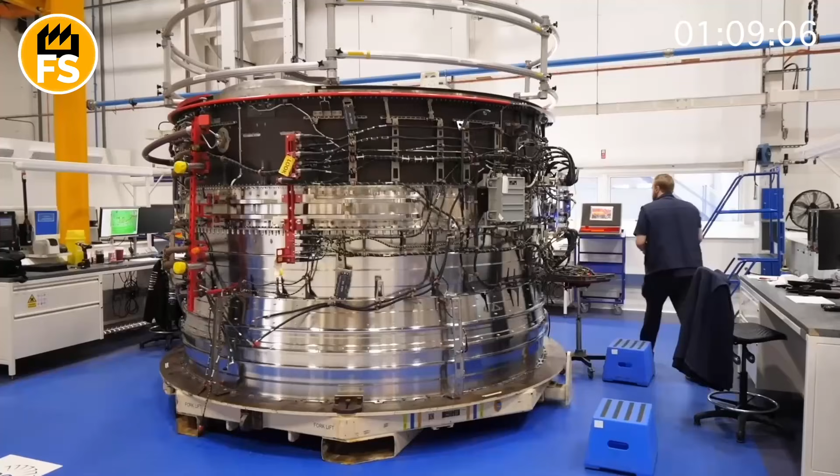Did you know that the machines powering global industry, transportation, and our electrical grids consume energy equivalent to building thousands of the Great Pyramids of Giza every single day? This hidden power isn't just about raw force. It's delivered by some of the most massive and awe-inspiring engines ever conceived.

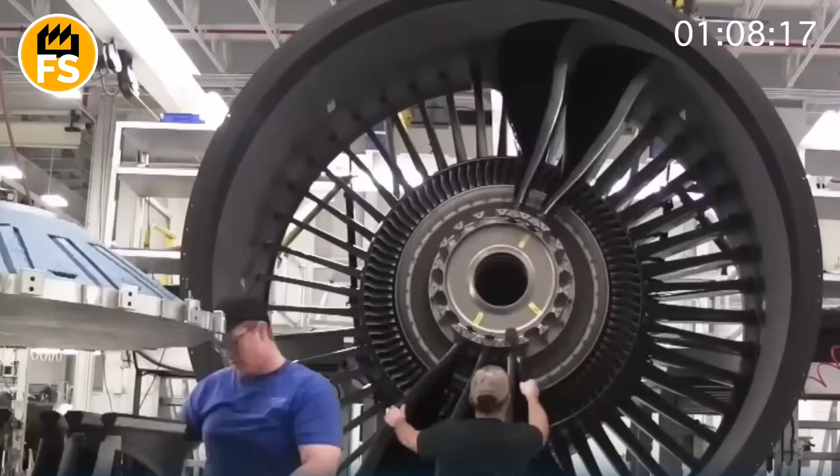From the dawn of the industrial age to today's modern world, engineers have chased the dream of bigger, stronger, more efficient powerhouses. Get ready to take a journey through history and dive into the incredible scale and engineering genius behind the world's most powerful and giant engines.

Our journey begins in the age of steam, a time when raw pressure was king. Picture the late 18th and 19th centuries. The engines that drove the Industrial Revolution weren't small. Early steam engines were clunky, but they quickly grew into colossal machines.

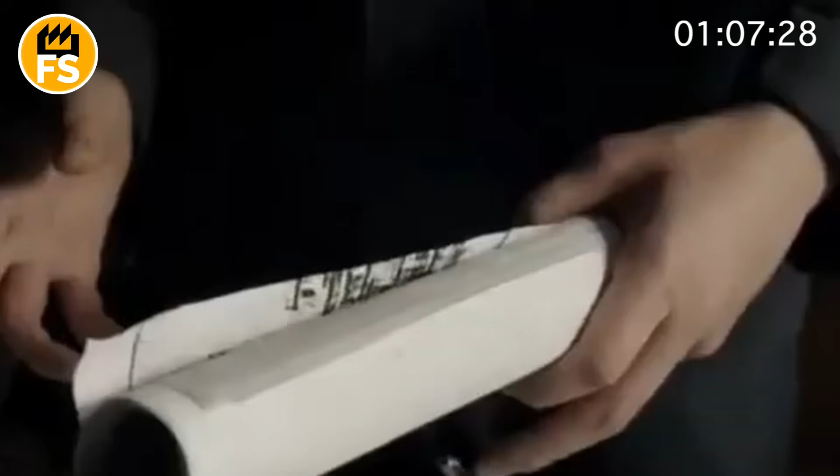Think of the beam engines, towering structures in factories and mines, with massive beams rocking back and forth, driving pumps and machinery with the power of boiling water. These were mechanical giants, their sheer physical size necessary to contain the immense forces of steam pressure.

As steam technology evolved, so did the engine's power and scale. Reciprocating steam engines became the heartbeat of global shipping. Imagine the engine room of a massive early 20th century ocean liner. You'd see multi-cylinder engines with pistons the size of trash cans, connecting rods like tree trunks, and crankshafts so large they needed multiple men just to inspect them.

These engines were colossal, spanning multiple decks, their rhythmic pounding driving propellers powerful enough to push thousands of tons across vast oceans. They were engineering marvels of immense moving parts, powered by the simple expansion of steam.

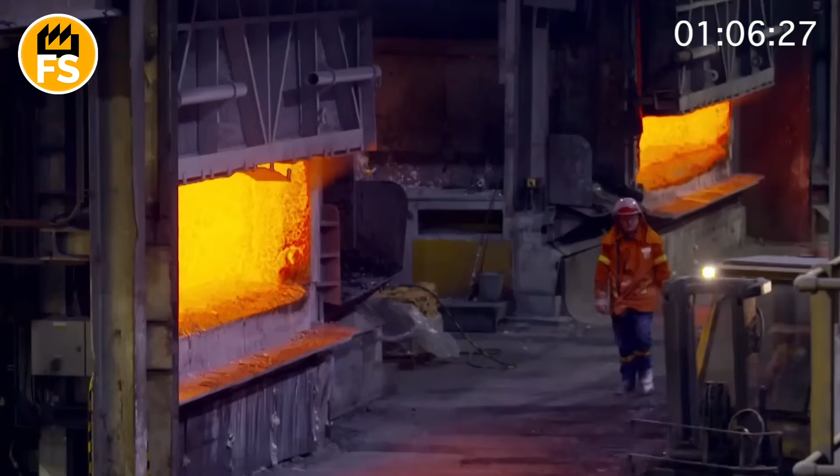While steam dominated for a long time, the early 20th century saw the rise of a new kind of giant, the diesel engine. Unlike external combustion steam engines, diesels burn fuel directly inside the cylinder. This was a game changer for efficiency and power density. Early large diesels quickly found their way into ships and power generation.

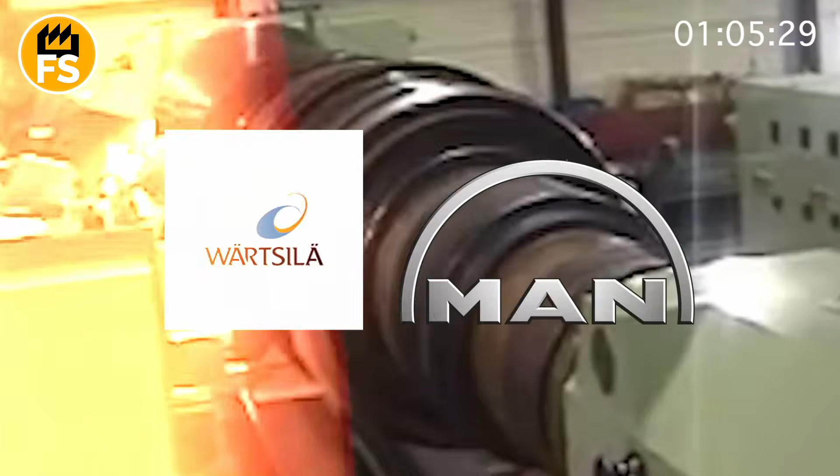Imagine a large, slow-speed marine diesel engine built for a cargo ship. These engines are absolutely colossal, often standing as tall as a multi-story building and stretching the length of a gymnasium. Modern marine diesel engines, like some built by Wärtsilä or MAN, are among the largest machines on Earth. The biggest ones have multiple cylinders, each with a bore diameter wider than a grown man is tall.

Their crankshafts are multi-piece monsters, weighing hundreds of tons. These engines produce over 100,000 horsepower, enough to move supertankers and container ships carrying 20,000 containers. The sheer scale of these components, pistons, connecting rods, crankshafts, cylinder blocks, is mind-blowing, a testament to achieving immense power and torque from internal combustion.

As technology advanced further, especially in the mid-20th century, the gas turbine emerged as another powerhouse. Unlike diesels or steam engines that use pistons, gas turbines burn fuel to create hot gas that spins a turbine wheel, similar to a jet engine. While aircraft engines are built for power to weight, industrial and power generation gas turbines are built for sheer output. Imagine a power plant gas turbine the size of a bus or even a small house.

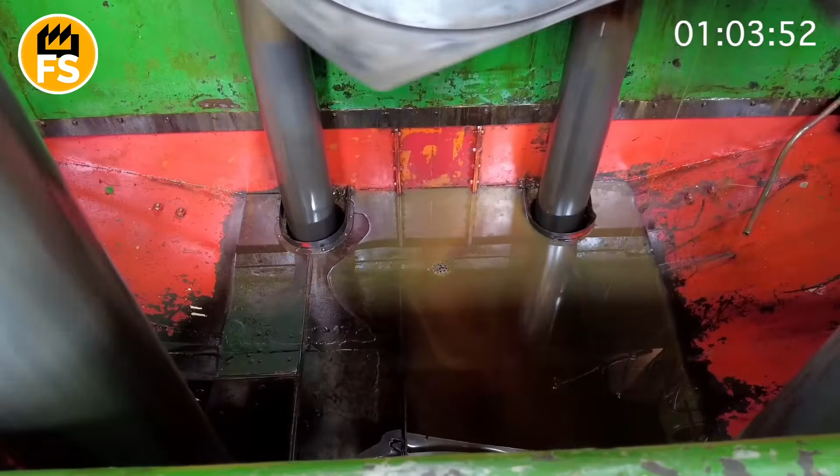Modern industrial gas turbines, like those in GE's H-class, are engineering marvels generating hundreds of thousands of kilowatts, enough electricity for hundreds of thousands of homes from a single unit. They involve incredibly complex internal components, spinning at thousands of revolutions per minute in temperatures hotter than molten lava.

Their power output, efficiency, and relative compactness compared to older technologies make them the giants of modern electrical generation. Some large ships, including cruise liners, also use gas turbines for their combination of power and smoother operation.

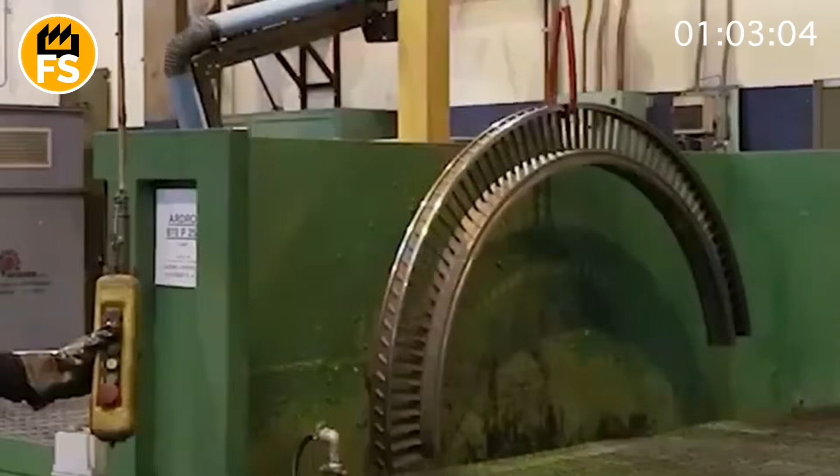Comparing these generations of giants is fascinating. Steam engines were the pioneers, relying on brute pressure and massive physical structures. Diesel engines brought efficiency and incredible low-end torque, dominating heavy transport. Gas turbines delivered immense power density and high-speed rotation, becoming the backbone of modern power grids and high-speed applications. Each technology pushed the boundaries of materials, science, and engineering to harness energy on an ever-increasing scale.

These engines, whether the visible, rhythmic giants of the steam age or the humming complex powerhouses of today, are the unseen heart of the modern world. They drive global trade across oceans, power the trains that move goods and people, generate the electricity that lights our cities and runs our factories, and fuel the massive pumps and machinery of heavy industry. They are a testament to humanity's relentless drive to build bigger, stronger, and more powerful machines.

So, the next time you see a massive cargo ship, a powerful train, or simply flip a light switch, take a moment to remember the incredible journey through history and the engineering genius behind the world's most powerful and giant engines. From towering steam engines and colossal marine diesels to blazing hot gas turbines, they are the hidden giants that built our modern world.

But what happens behind the scenes in the production of these critical components? How are tons of metal transformed into complex, high-precision parts? Today, we're diving into the fascinating world of industrial manufacturing, and we'll show you the whole journey, from raw material to finished cylinder head. Cylinder heads are most often made from two primary types of materials: aluminum alloys and cast

iron. As of 2025, over 75% of modern automotive engines are equipped with aluminum heads, due to their lightness, good thermal conductivity, and the reduction of the overall weight of the power unit. One aluminum cylinder head assembly weighs on average between 10 and 20 pounds, whereas cast iron equivalents can exceed 40 pounds. Aluminum for such parts isn't just metal, it's a high-quality alloy, for instance with added magnesium or copper, which provides strength at high temperatures.

The main suppliers of aluminum are countries like the People's Republic of China, which provides over 60 million metric tons annually, and India. In the United States, the majority of aluminum raw material is supplied by sea transport in the form of ingots or granules, which are subsequently remelted at local foundries. One standard 20-foot container holds up to 48,000 pounds of aluminum ingots, which is enough to produce over 1,000 heads.

Cast iron, although less popular in new engines, is still actively used in heavy machinery and trucks due to its durability. Its production requires components: iron ore, coke, and limestone. The United States partially extracts ore itself, but imports a significant portion from Canada and Brazil. Rail transport is used. One typical train with raw materials can deliver 10,000 to 15,000 tons of iron ore to metallurgical plants. After the materials arrive at the facility, they undergo cleaning, sorting, and melting.

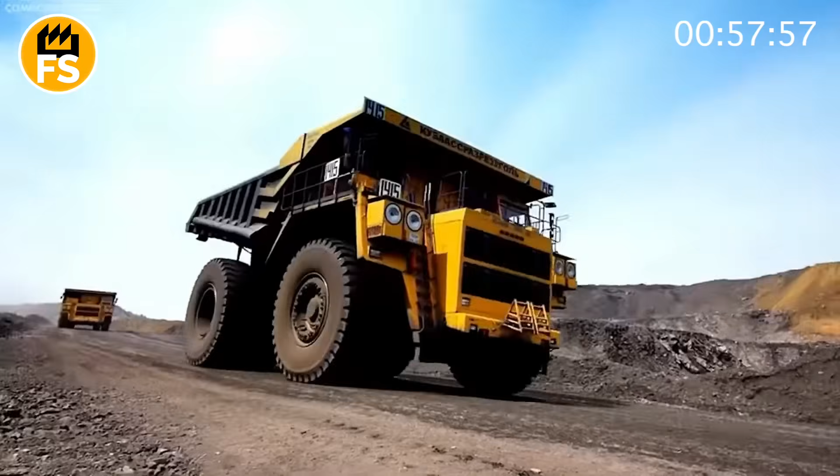Before melting, the aluminum is cleaned of impurities and moisture to avoid porosity in the finished casting. For this, the raw material is placed on vibrating tables with metal detectors or sorting conveyors. Robots or operators manually or mechanically reject unsuitable material. This is how contaminants, paint, oil, plastic, and shavings of other metals are identified. Thanks to quality cleaning of aluminum before melting, the rejection rate is reduced by 60 to 80%.

The storage temperature for the raw material is controlled, about 70 degrees Fahrenheit, to avoid condensation, which can cause microbubble explosions if it gets into the molten metal. After cleaning from moisture and impurities, the aluminum is fed into large melting furnaces. These can be gas or induction units that heat the metal to approximately 1,220 degrees Fahrenheit. A stable melting temperature is maintained in these furnaces thanks to automated control systems, which prevents overheating and preserves the homogeneity of the future alloy.

Furnaces typically have a volume of 5 to 10 tons, and one such furnace can produce up to 300 or even 500 cast cylinder heads per shift. One shift lasts 8 or 12 hours. The production flow is set up so that the molten metal is continuously supplied for casting, so even 15 or 20 minutes of downtime can cost the enterprise thousands of dollars due to lost pace and cooling of the material.

Alloying elements are added to the molten aluminum, primarily silicon and magnesium. These elements increase the strength, heat resistance, and wear resistance of the finished part, making it suitable for operation under high pressure and fluctuating temperatures in the engine. As you can see, magnesium doesn't just improve human strength and wear resistance, but aluminum's too.

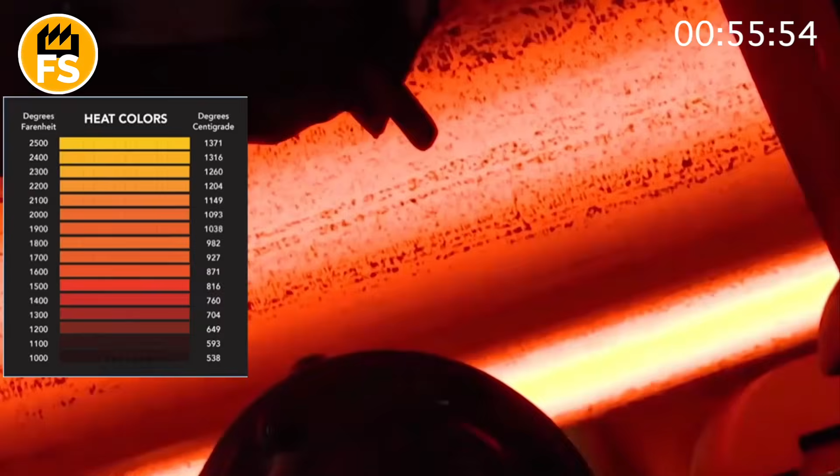After adding additives, the alloy necessarily passes through a ceramic filtration system. Special porous filters capture oxides, microscopic particles of slag, and residual impurities. Without this filter, slag could get into the mold, form microcavities in the part's structure, and reduce its lifespan by tenfold. Filtration usually occurs in the ladle or holding furnace, where the molten metal is transferred from the main furnace.

This is an intermediate stage where the metal is again stabilized by temperature and checked for chemical composition using spectrometers to precisely match tolerances. After cleaning and filtration, the molten aluminum goes to the casting shop, where it is poured into molds, a key moment when hot metal turns into a specific part, the cylinder head. This process must be extremely precise because the mold is complex, with numerous channels and cavities, and the engine's performance depends on the casting quality.

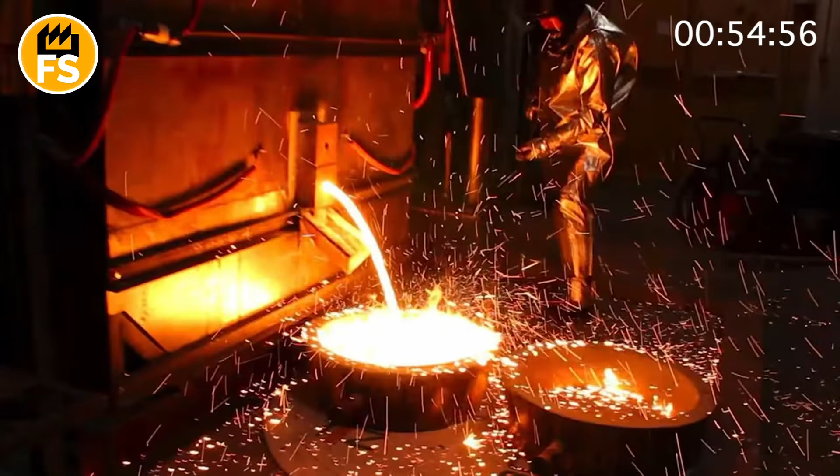Most often, gravity die casting or high-pressure die casting are used for head production. In the first case, the molten metal flows by gravity into a metal mold that can withstand several thousand cycles. In the second, the molten metal is injected under pressure up to 10,000 psi, ensuring precise filling of even the smallest channels. The mold, made of high alloy steel, is preheated to 400 degrees Fahrenheit or more to avoid thermal shock. The metal is supplied from a ladle or through an automated continuous feeding channel.

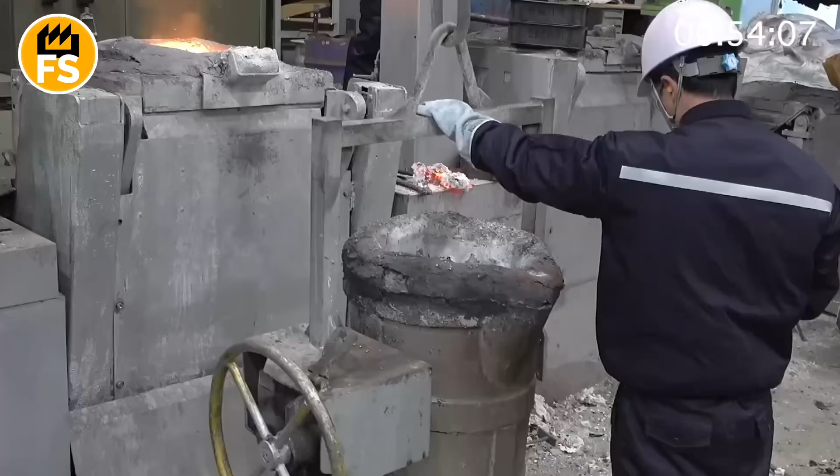A venting and gating system ensures air displacement, otherwise voids will form. The metal cools in the mold for 30 seconds to 1.5 minutes, after which the mold opens and the casting is sent on for further processing. Modern lines are equipped with sensors for temperature, pressure, and filling. The control system monitors the volume of molten metal, feeding speed, mold temperature, and metal temperature in real time. A deviation of more than 2%, and the machine automatically rejects the blank or adjusts the parameters. One casting station produces 40 or 60 heads per hour, depending on the technology.

After the casting and cooling of the metal are completed, the next stage begins, removing the head from the mold. If sand casting was used, the mold is broken. It's a single-use structure made of a sand clay mixture, so it's simply broken apart to get the casting. In the case of die casting, a metal mold is used, which automatically opens, and the part is ejected by special pushers. At this stage, the so-called gray or rough blank is obtained, an unprocessed head with gates, risers, and irregularities. Its weight is 10 to 20 pounds, depending on the engine type and design.

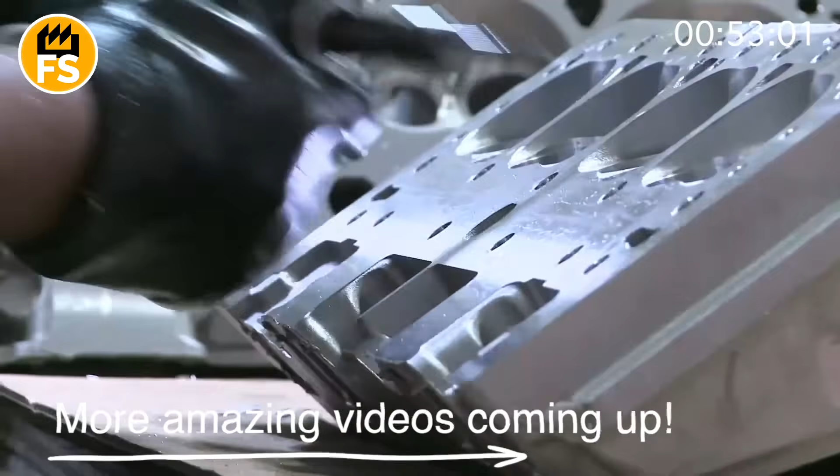Almost immediately after removal, the heads are often sent for heat treatment. This typically includes quenching and tempering. The process involves heating to 1000 degrees Fahrenheit, holding at that temperature, and controlled cooling. This strengthens the metal structure, increases hardness, wear resistance, and thermal stability, critical parameters for operation in the engine's hot zone.

After heat treatment, the cylinder head proceeds to the computer numerical control machining stage. The head is secured on a fixture in a multi-axis machining center. A computer program precisely sets the coordinates, speed, and order of processing. Machining includes milling the mating surface to the engine block, drilling holes for bolts and other parts, boring channels for coolant and oil, forming valve seats and guides. One machining center can complete a full cycle in 10 or 25 minutes.

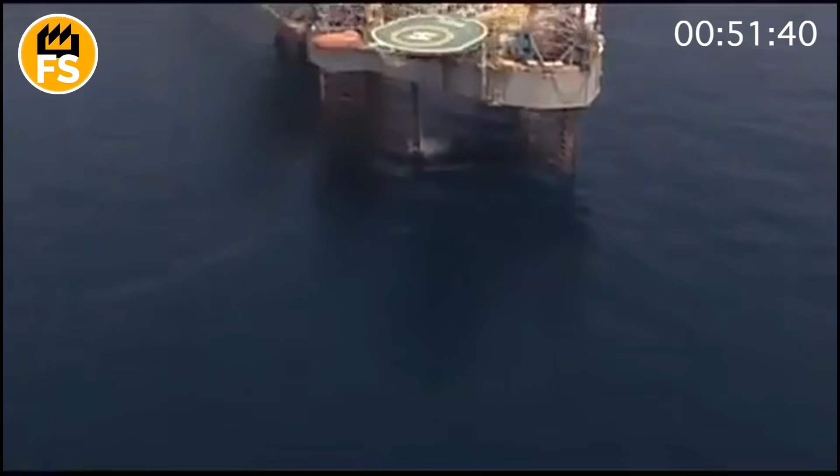It all starts deep underground and ends up in your stove. Geologists hunt for gas, drilling rigs pierce the Earth's crust, and an explosive cocktail of gas, oil, and water erupts from the depths. Next, separators that stratify everything down to the last drop. Compressors that push fuel through pipes stretching 300,000 miles. And finally, the gas is cooled to negative 260 degrees Fahrenheit, turning it into a liquid to be transported across oceans. But how does it not explode? And how is it made safe for your kitchen? Watch and find out how gas really works.

It all begins with geologists searching for true treasures underground, natural gas deposits. And no, they don't walk around with shovels. They use seismic waves to understand where gas is hiding beneath the earth. Once a location is found, well drilling begins. Imagine a drilling rig that can reach depths of over 10,000 feet. The well diameter is usually between 8 and 30 inches, and drilling takes weeks.

After drilling the well, steel pipes are installed to reinforce the walls and prevent the well from collapsing. Then comes the magic. Under pressure of hundreds or even thousands of pounds per square inch, gas, along with oil, water, and a bunch of impurities, rushes to the surface. For this, special valves, Christmas trees, are used to control the flow and pressure.

When gas, oil, and water erupt from the Earth's depths, they resemble a dirty cocktail with millions of particles of sand, salt, and other surprises. To separate this mixture into pure components, engineers use separators. The mixture, under pressure of up to 500 psi, enters the separator through an inlet nozzle.

The first task is to reduce the flow velocity so that gravity can take effect. An inlet deflector, a baffle that breaks up the stream and slows down the movement, is used for this. Imagine sharply braking in a car. Heavy particles like sand and clay immediately fall to the bottom, while lighter ones continue to move.

In the separator, the mixture separates into 3 layers. The bottom layer, water and sand. These are the heaviest components. Water with salts and fine particles settles first. Oil is lighter than water, but heavier than gas, so it floats in the middle. Methane and other light hydrocarbons rapidly rise to the top.

To speed up the process, separators sometimes have inclined plates or cyclone modules installed, which increase the settling area. For example, plates angled at 45 degrees cause oil droplets to coalesce and fall down faster.

If oil and water form an emulsion, demulsifiers, chemical substances that break the bond between droplets, are added to the separator. Sometimes, vibrating screens are used to filter sand from the bottom layer. The gas, meanwhile, passes through wire mesh mist eliminators that collect residual liquid droplets.

Float-level sensors monitor the thickness of the oil and water layers. If there's too much oil, a valve opens and it flows into a collection tank. A gas valve at the top regulates the pressure so that the gas doesn't exit too quickly. The ideal pressure is between 100 and 300 psi for effective separation. A sand dump valve periodically opens to remove sediment from the bottom.

A separator is a complex device where physics, chemistry, and mechanics work together to create 3 separate streams. After all, if gas contains liquid droplets, it can damage pipelines through corrosion or hydraulic shock. And 1% water in gas reduces its heating value by 5, or even 7%. That's like adding gasoline to your latte.

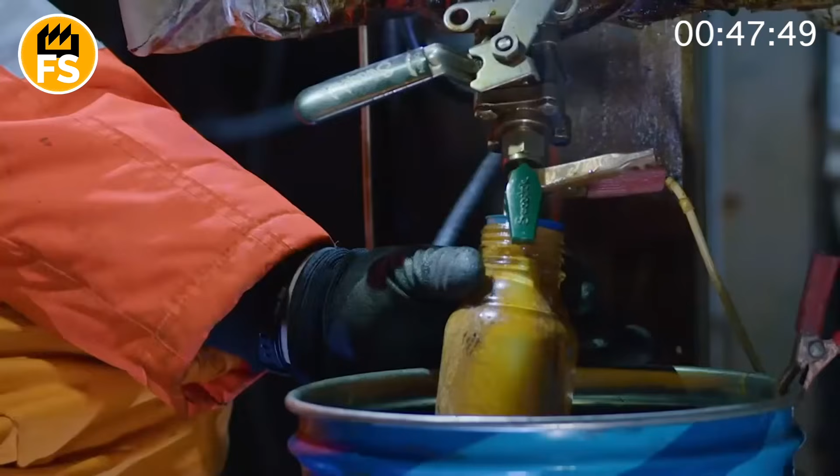Oil from the separator is sent to storage tanks, water is purified or re-injected into the formation, and gas heads to dehydration units. Some gas components, propane, butane, ethane, can be separated out. To do this, the gas is cooled to negative 150 degrees Fahrenheit, and these components condense. They are collected in special tanks and sold separately. For example, propane for grills or butane for lighters.

Clean gas isn't ready for its journey yet. It needs to be compressed to a pressure of 800 or even 1,200 psi to be pushed through mainline pipes that stretch for thousands of miles. Compressor stations, true giants with engines producing thousands of horsepower, are used for this.

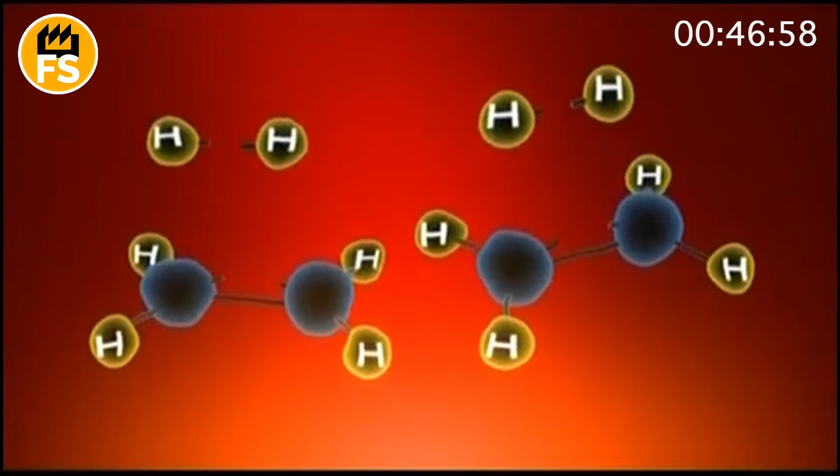Gas moves through mainline pipelines with diameters ranging from 24 to 48 inches. They run underground at depths of 3 to 6 feet, and their length can reach thousands of miles. Compressor stations are located every 50 to 100 miles to maintain pressure.

When more natural gas is extracted than is currently needed, it isn't just vented or left idle. This valuable resource is stored in special underground storage facilities, which can be imagined as huge banks for gas. The most common types of such storage are depleted oil or gas fields, as well as salt caverns, located at depths of up to 3,000 feet underground.

Depleted oil fields are cavities left after oil or gas extraction. They have natural geological barriers that prevent gas from escaping. Gas is injected there under pressure through special wells, where it is stored in porous rock, filling the voids previously occupied by oil or water. A single well can produce up to 10 million cubic feet of gas per day.

Salt caverns are artificially created cavities in salt formations. They are formed by dissolving salt with underground water, creating large voids that are ideal for gas storage. These caverns have high integrity and allow for rapid injection and withdrawal of gas, making them very effective for regulating supply. Underground gas storage is very important for the stability of the energy system.

In winter, when gas consumption increases due to heating, additional gas is withdrawn from these storage facilities to meet consumer needs. Similarly, during peak load periods or emergencies, these underground banks help prevent supply interruptions.

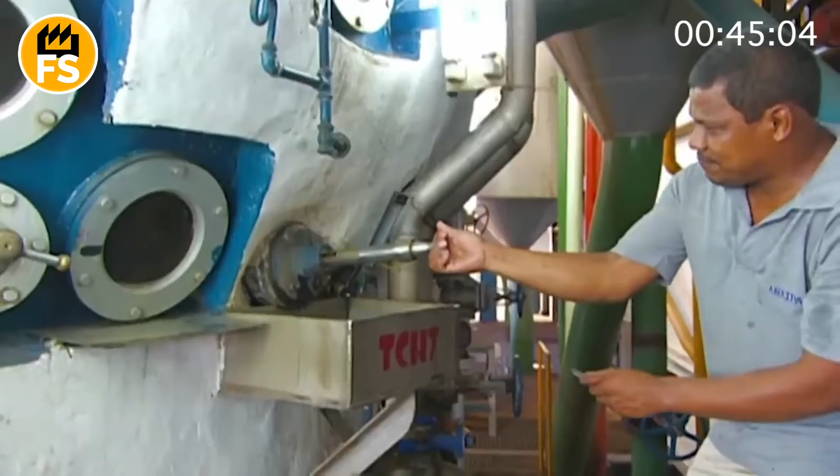Storing gas underground is also economically advantageous, as it allows for balancing production and consumption, reducing costs for surface transportation and storage. It's a reliable and safe way to ensure that gas will always be available when it's needed most. The length of gas pipelines in the United States is over 300,000 miles.

Before gas reaches your home, it undergoes another check for purity and pressure. At distribution stations, the pressure is reduced to 0.25 psi, which is safe for home stoves and boilers. For safety, a special odorant, mercaptan, is added so you can detect a gas leak.

At all stages, from the well to your kitchen, gas is monitored by pressure, temperature, and composition sensors. In case of an emergency, valves shut off the flow in seconds. Personnel undergo training, and systems automatically record the slightest deviations.

Besides homes, gas is supplied to power plants, factories, and chemical plants. For industrial consumers, the pressure and volume are higher. Pipes with diameters up to 48 inches and pressures up to 1,500 psi are used here.

Gas can be liquefied. It's cooled and transported by tankers across seas. First, the gas is compressed, meaning it's made very dense, like when you squeeze the air in a balloon. It becomes smaller in volume, but warmer. Then, this warm compressed gas is passed through special coolers.

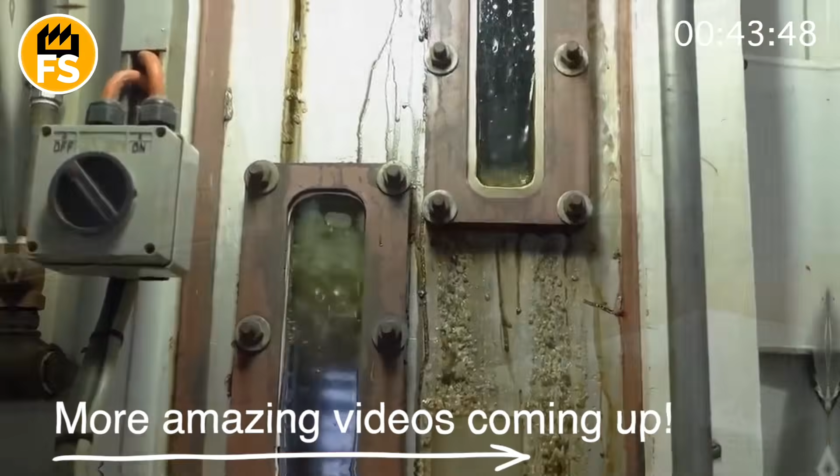After that, the gas is passed through special devices, expanders, which allow the gas to expand and cool down even more, like when you let air out of a balloon and it becomes cold. Thanks to this, the gas cools down significantly, to about -260 degrees Fahrenheit. When gas cools to such a low temperature, it turns into a liquid, like water, but very cold. This liquid gas takes up about 600 times less space than in its gaseous state, so it can easily be stored in special tanks and transported by ships.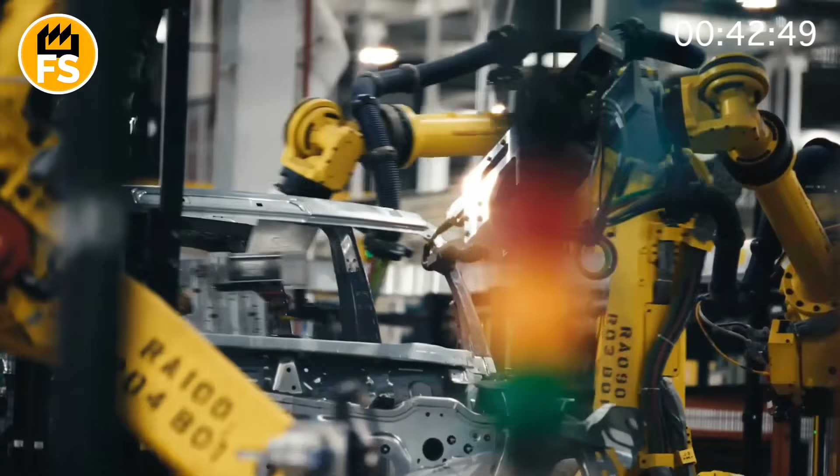Imagine a machine that can withstand the blast of a high-explosive device, endure fire from automatic weapons, and keep rolling even with shot-through tires. This is the legendary Hummer, designed for the most dangerous missions. From operations in the Persian Gulf to modern combat zones, over 280,000 armored Hummer vehicles have become an essential part of the United States Army.

How do these machines go through their testing? Which materials protect the crew? And why do they produce 70 of them per day? Let us find out.

To understand why the Hummer became synonymous with invincibility, one should first look back at its history. In the 1980s, the American automobile company called AM General unveiled a modified Hummer that was initially developed for the civilian market. However, the troops quickly recognized its advantages for modern warfare, especially on the front lines, where soldier protection is paramount and armored vehicles became critically important for safety.

A true breakthrough came after the Hummer became the main transport vehicle for the United States military during operations in the Persian Gulf at the beginning of the 1990s. Since the year 1983, over 280,000 Hummer units have been manufactured. But how can one ensure that this off-roader not only endures harsh conditions, but also provides protection in the most hazardous situations? What exactly sets the military armored Hummer apart from civilian models? Let us see how the armored components are constructed to turn these vehicles into a genuine steel shield on wheels.

Military Hummer vehicles use specialized armor materials, including composite armor that combines steel plates with ceramic inserts. These materials can withstand shots from a variety of weapons, including automatic rifles and sniper rifles. Moreover, by incorporating composites, these vehicles are not only armored, but also relatively light for their size. The production rate is around 70 vehicles per day.

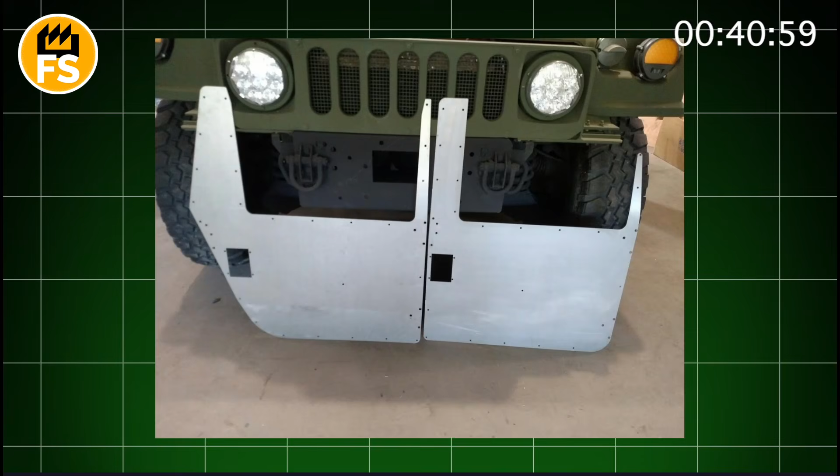A key structural element of the armored Hummer is the concept of plus armor. This means that multiple layers of protection are added onto the vehicle, enabling maximum defense in a wide range of combat scenarios. There are also additional design modifications, such as reinforced suspension and strengthened tires, allowing the vehicle to keep moving even if one of the tires has been damaged.

Another important aspect is the strengthened floor and roof. In military Hummer vehicles, the floor is structurally protected against blasts. Special materials are used to absorb the shockwave, which reduces risk to the crew if the vehicle encounters a minefield or an explosive device. However, armor is only one part of the overall safety level. Each high-mobility multi-purpose wheeled vehicle, commonly known as the Hummer, consists of over 5,000 parts.

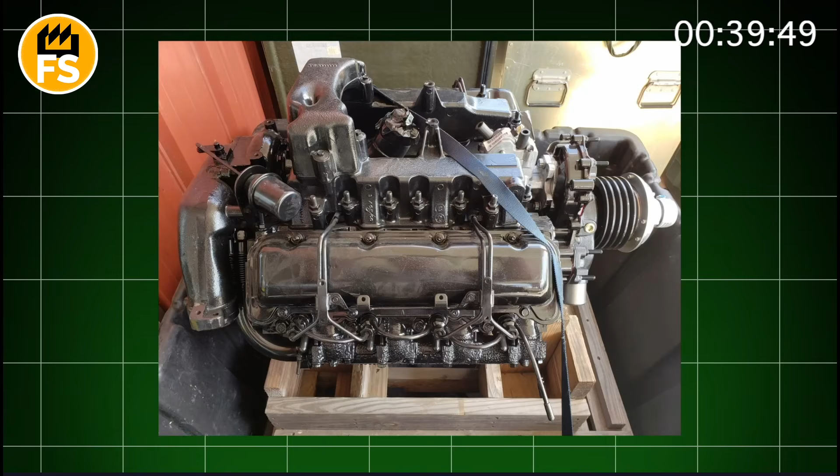Combat Hummer vehicles must not only be protected, they must also be real beasts capable of moving through absolutely any conditions. How is this kind of mobility achieved? In order to preserve high off-road capability and endurance, military Hummer models are equipped with a powerful diesel engine. This engine can generate substantial power that lets the vehicle easily travel through desert sands or mountainous routes, even if there is no road at all. A specialized transmission and adapted rear wheels ensure constant stability in the most extreme conditions.

Many modern military Hummer vehicles integrate intelligent control systems that allow the engine and transmission to adapt to the terrain. This significantly boosts maneuverability and endurance during large-scale strategic movements. Armored versions receive steel that is 1/2 inch thick, along with bullet-resistant glass that is 1.5 inches thick.

Besides armor, electronic safety systems are vital, such as sensors that detect mines and explosive devices, along with systems designed to remain fire-resistant. They add another layer of protection for the crew, which is particularly critical in combat situations. What else is worth mentioning when talking about armored Hummer vehicles? There are several technical considerations to bear in mind.

Military Hummer versions often feature specialized camouflage coatings that help them blend into the environment. This is crucial for enhancing survivability on the battlefield, where every detail can make a difference. Interestingly, the Hummer is not a static vehicle. Its design allows modifications based on mission needs.

These can include additional weapon systems, medical equipment, or other specialized modules, depending on the task at hand. A military Hummer can carry up to 2,500 pounds of cargo or tow up to 7,500 pounds.

Producing armored Hummer vehicles is a complex and lengthy process that demands highly skilled engineers and advanced technology. Everything starts with meticulous planning. Engineers account for every aspect, from improved mechanical components to resilience during blasts. Multiple prototypes are built, each undergoing a battery of tests. They are dropped from heights, fired upon, and examined for endurance in different conditions.

Previously, AM General, the company that originally created the legendary Humvee, was in charge of production. However, in the year 2020, the license to manufacture new military vehicles was granted to Oshkosh Defense. As a result, combat Hummer vehicles are gradually being replaced by the Joint Light Tactical Vehicle, a more modern armored off-road vehicle. Therefore, military and civilian versions are produced separately, using different factories, technologies, and even materials.

The body and armored panels are cut using laser or plasma machines, and then they are welded by robots and highly qualified specialists. Precision is crucial, because all seams must be airtight to enhance blast resistance. The Hummer is built on a robust steel frame, designed to withstand high loads. The chassis and engine are assembled separately, then tested for functionality. Only after that are they joined with the body.

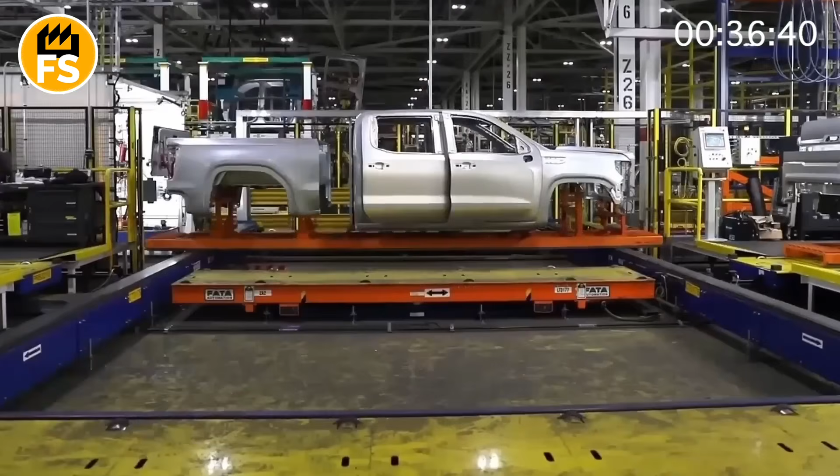Once the main parts are put together, the vehicle is fitted with armored panels and additional protection. This stage is time-consuming because every component must be installed with the utmost precision. The interior of a military Hummer is nothing like that of a civilian vehicle. Everything is dedicated to functionality. Some models have air conditioning, which is essential in desert conditions.

After assembly, the vehicle is painted with special scratch and corrosion-resistant paints. Several options are employed: desert camouflage for sandy regions, woodland or urban camouflage for the respective environments, and anti-radar coating to reduce visibility on radar systems. This is no ordinary paint. It is formulated to withstand heat, freezing temperatures, and the impact of blasts.

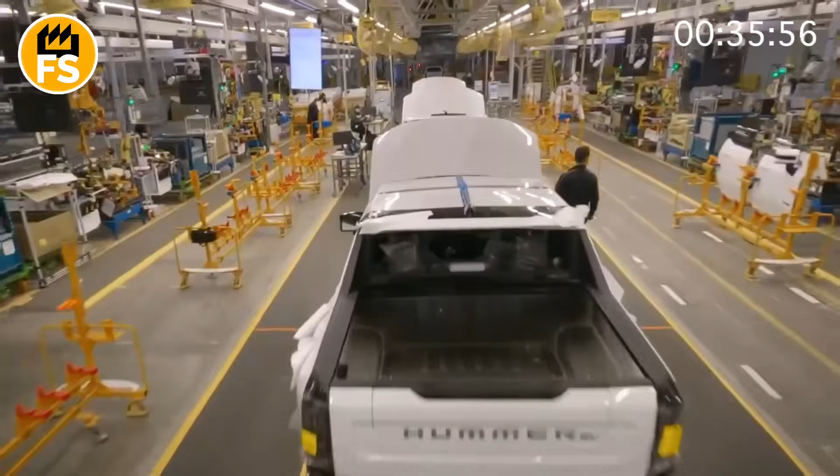The high-mobility multi-purpose wheeled vehicle is not produced in the same way as mass-market civilian cars. It is manufactured in relatively small batches, so fully automated production is impractical. At the same time, certain processes, such as welding and painting, are streamlined by a conveyor system for speed and consistency.

Each high-mobility multi-purpose wheeled vehicle is equipped with a 396 cubic inch diesel engine that outputs 190 horsepower. This powerful diesel engine is engineered to operate under extreme conditions. The transmission is a 4-speed automatic adapted for off-road use. The vehicle has permanent 4-wheel drive and automatic differential locks.

It accelerates to 37 miles per hour in approximately 17 seconds. It is slow, but speed is not the main goal for the military. For military transport, the priorities are off-road performance, reliability, and endurance. The high-mobility multi-purpose wheeled vehicle is not designed for swift maneuvers, but for traveling over any type of terrain.

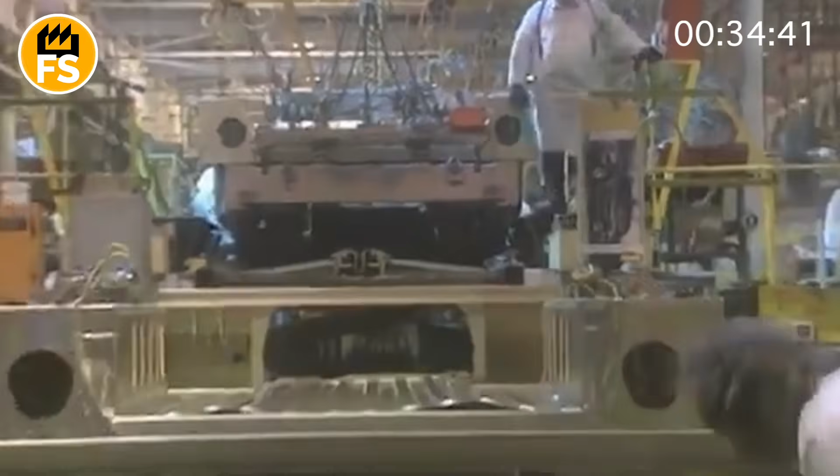It has a high ground clearance of 16 inches, which allows it to clear rocks, ditches, and logs. Full-time 4-wheel drive and differential locks prevent it from getting stuck in mud or sand. The engine and fuel system are protected to withstand fire and blasts. There is minimal onboard electronics, meaning fewer things can break down in the field.

It can continue moving on punctured tires. Special inserts allow driving even after the tire has been hit by a bullet. Its payload capacity allows transporting ammunition, injured personnel, and weapons ranging from machine guns to anti-tank missile systems. It may not be the fastest ride, but it will get you where others simply cannot go.

The standard military high-mobility multi-purpose wheeled vehicle initially did not have armor, but since the year 2000, most models have received protection against small arms fire and shrapnel. Configurations vary, from soft body transport versions to the most widespread ones, capable of withstanding a high explosive device blast of up to 13 pounds. There are models with protection systems against chemical, biological, and nuclear weapons. Assembling a single high-mobility multi-purpose wheeled vehicle takes from 3 to 5 days, depending on the armor.

At the AM General facility, where they build the high-mobility multi-purpose wheeled vehicle, there can be up to 3,000 workers in one workshop. However, only about 25 or 30 individuals work on assembling a specific vehicle at any given time. These include welders, mechanics, electricians, and armor specialists, each carrying out their tasks at each stage of the production line. The more complex the version, the more time and personnel are required.

Before they are shipped, all high-mobility multi-purpose wheeled vehicles undergo 310 miles of test trials across off-road terrain, water, and dust. You already know how the Hummer is painted, but allow me to elaborate on the special matte paint known as chemical agent-resistant coating, which has several important properties. It does not reflect infrared light, making it harder to detect the vehicle with thermal imaging and night vision equipment.

It resists chemical attacks. Its formulation makes it easier to wash off hazardous substances following chemical contamination. It withstands scratches and corrosion, enduring impacts from branches, sand, rain, sun, and aggressive liquids. The matte finish eliminates glare, which is critical for battlefield camouflage. The painting process involves multiple layers that are applied to the aluminum body and armored panels.

Imagine this. Every single year, all around the world, over 70 million automobiles are manufactured, and each one of them demands high-technology glass. From the broken flask with nitrocellulose that accidentally revealed laminated glass, to the powerful hydrophobic coatings, the history of this material is truly astonishing. Today, we are going to learn how glass becomes ultra-strong, safe, and prepared to protect us from wind, rain, and the dangers of the road. Please get ready for a journey into the realm of advanced modern technology.

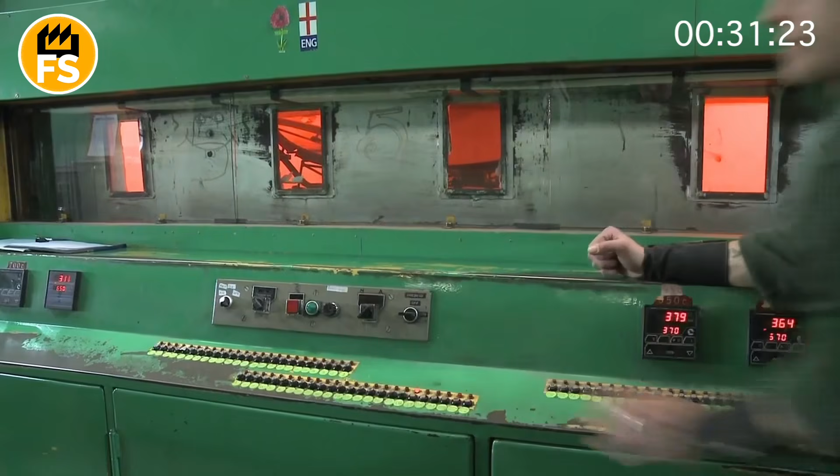Thousands of short tons of glass scrap are recycled in order to create crystal-clear windows for automobiles. It is not only about safety, but also about saving precious resources. And that is just the beginning. The history of automobile glass production is closely linked to the development of the automobile industry, which emerged in the late 19th century. The glass used in today's automobiles has undergone a long path of improvements that have made it safer, stronger, and more functional.

When the very first automobiles began to appear, they were initially not equipped with any glass at all. The open body design offered only partial protection to passengers, while dust, wind, insects, and other hazards made traveling extremely uncomfortable. Later on, when automobiles became faster, the need for driver and passenger protection emerged. Windshields were first made from ordinary window glass, which, although it provided some degree of protection, had a serious drawback. In accidents, it would shatter into large, sharp fragments that resulted in numerous injuries.

The first groundbreaking discovery in the field of automobile glass was the creation of laminated glass. This happened by chance. In 1903, a French chemist named Edouard Benedictus accidentally dropped a flask coated with nitrocellulose. The glass cracked but stayed in one piece, thanks to the thin layer of plastic. This accident inspired the scientist to develop a multi-layered glass, which later became the basis for triplex.

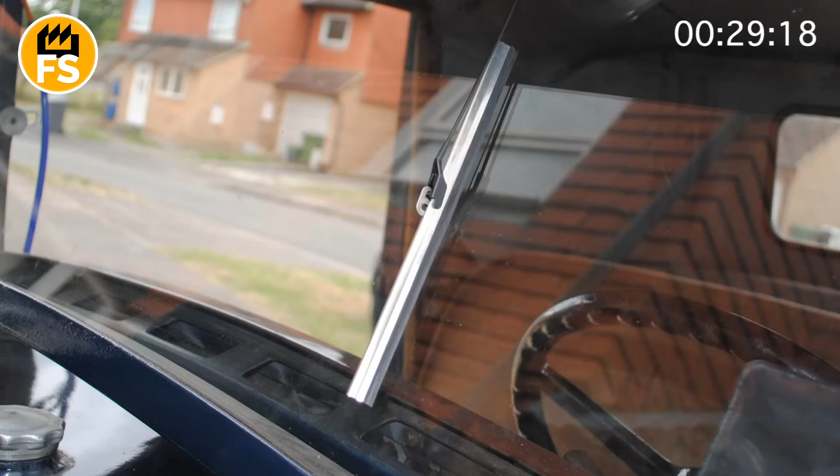By the 1910s, laminated glass was already being used in premium-class automobiles. Its construction consisted of 2 layers of glass with a thin, transparent film in between them. In the event of impact, the glass did not scatter, and cracks remained on the film. In the 1920s, laminated glass began to be widely used in the production of windshields. Its main advantage was increased safety. Even in serious accidents, the fragments did not fly apart, but remained embedded in the polymer layer.

The next stage in the evolution of automobile glass arrived in the 1930s, when the technology for making tempered glass was patented. This material was produced by heating the glass to high temperatures followed by a rapid cooling. As a result of such a process, the glass became stronger, and upon breaking, it would fracture into small pieces with dull edges, minimizing injuries. By the middle of the 20th century, tempered glass was being used for the side and rear windows of automobiles. It was less expensive to manufacture compared to triplex, and provided a sufficient level of safety for those parts of the vehicle.

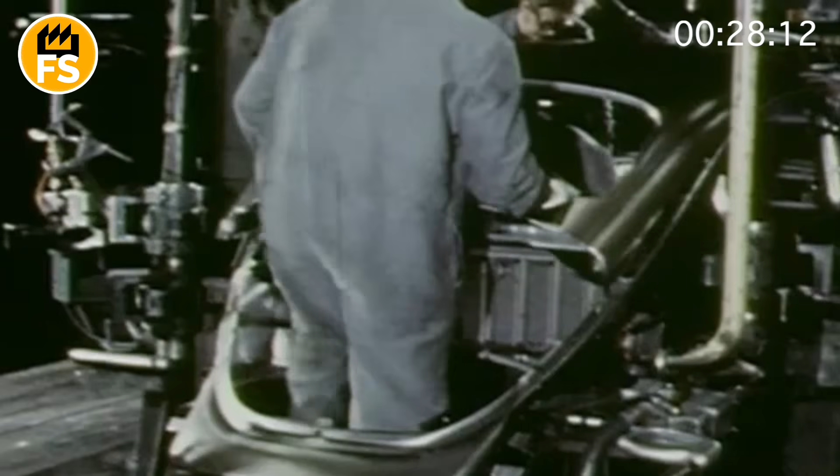In the 1950s and 1960s, automobile glass became even more advanced thanks to ongoing technological progress. During this time, several important changes took place. Improvement of triplex. The development of new polymer films made laminated glass more transparent, resistant to ultraviolet radiation, and more durable. Mass production. The automation of manufacturing processes drove down the cost of automobile glass, making it more affordable for a wide range of consumers. Coatings for sun protection. Special coatings that blocked ultraviolet rays and reduced the heating of the automobile cabin were used for the first time.

One of the most significant technological breakthroughs in glass production was the invention of the float method in 1959. This technology, developed by the British company Pilkington, enabled the manufacturing of perfectly smooth glass by allowing molten glass to spread across the surface of molten tin. Through this method, the glass became more uniform, stronger, and better suited to mass production. Even today, the float method remains the foundation of automobile glass manufacturing, ensuring precise dimensions, a smooth surface, and high quality.

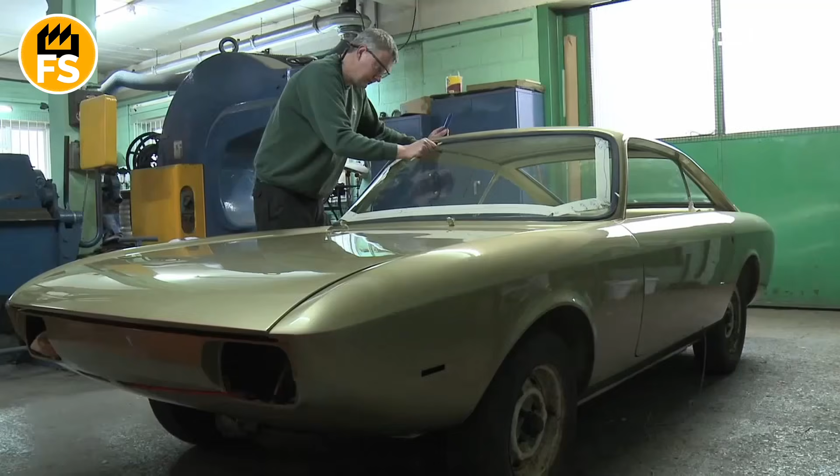In the second half of the 20th century, automobile glass underwent even more changes aimed at improving both safety and comfort. In the 1960s, heating filaments began to be installed in the rear window of automobiles, preventing condensation and freezing. In the 1980s, glass was introduced with special metallic coatings that reflected sunlight and reduced heat buildup inside the vehicle. Glass with ultraviolet protection. With the introduction of new technologies, automobile glass began providing virtually complete protection from harmful ultraviolet radiation.

And now, we enter the modern period of automobile glass production, which we will discuss at this very moment. We shall start with the glass used in automobiles. Automobile glass is divided into several types, depending on its purpose and manufacturing technology. Windshield. This is usually multi-layered glass composed of two sheets of glass with a polymer film between them. This design ensures that, if damaged, the glass does not break into sharp fragments.

Side and rear glass. Most often, this is tempered glass, which, upon impact, fractures into small, blunt-edged pieces that reduce the risk of injury. Panoramic roofs, or other special types of glass, often use laminated or tempered glass with specialized coatings for protection against ultraviolet radiation.

The main components of glass are natural materials, which are mixed in certain proportions to achieve the desired properties. Quartz sand is the principal element in glass, giving it transparency. It must be extremely pure and contain minimal impurities. Soda is added to lower the melting temperature of glass. Lime improves the mechanical durability and chemical characteristics of glass. Additional additives. These are used to adjust color, transparency, resistance to ultraviolet light, and other properties.

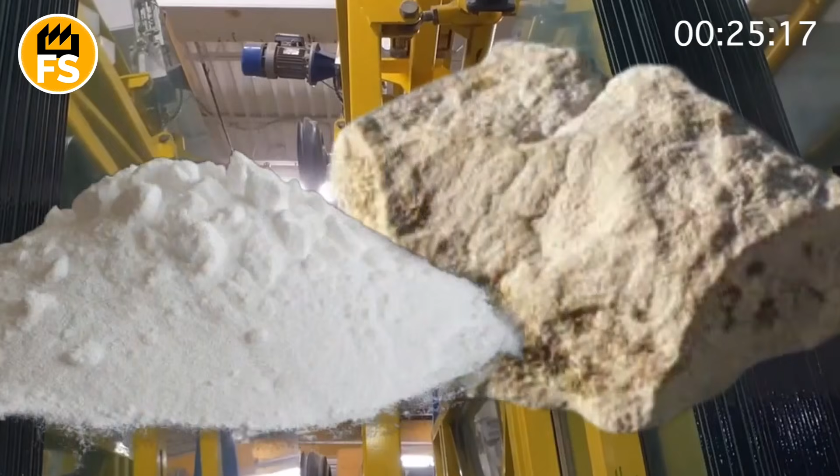The raw materials are cleaned, dried, and ground to a uniform state. It is crucial to eliminate as many impurities as possible, as they can affect the quality of the glass. After preparation, the raw mixture is poured into special furnaces for melting. This stage includes a few important steps, so let us review them together. Melting temperature. To create molten glass, a temperature of about 2,732 degrees Fahrenheit is used. Throughout the melting process, the raw materials transform into a uniform, viscous liquid.

Homogenization. The molten glass is stirred to distribute components evenly. This is important for preventing air bubbles or other irregularities in the finished product. The furnaces for melting glass are equipped with modern systems for temperature control and process automation, which guarantee the high quality of the final product. After melting, the molten glass proceeds to the forming stage, most commonly performed using the float method in modern manufacturing.

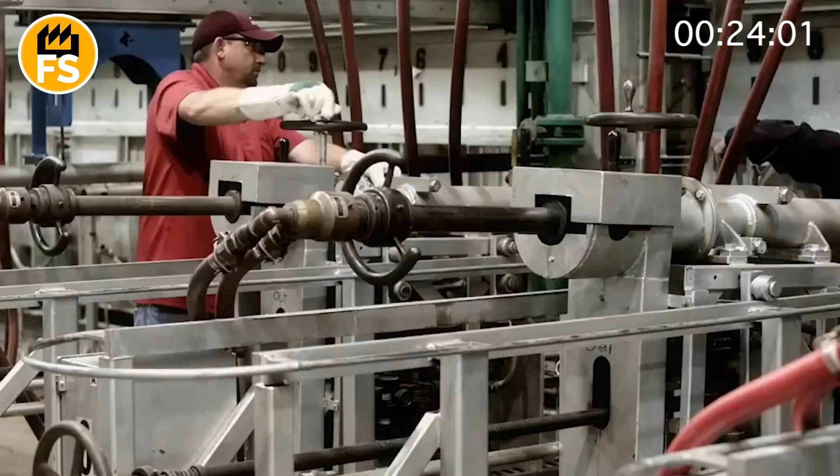Feeding the molten glass. The liquid glass flows from the furnace onto a bath of molten tin. Due to the high density of tin, the molten glass spreads out uniformly across its surface. Under its own weight, the glass forms a perfectly even and smooth surface. Gradually lowering the temperature makes the glass grow solid. By the time it leaves the tin bath, it is ready for further processing. The float method allows the production of glass sheets with precise geometric parameters and a very high quality finish.

Once it is cooled, the sheets of glass are cut to the sizes required for automobile manufacturing. Automated cutting machines ensure accuracy, and to prevent chips or cracks, the edges of the glass are polished. Every sheet is checked for defects, such as microcracks, bubbles, or other damage.

Next, to ensure the strength and safety of automobile glass, it undergoes the process of tempering. The glass is heated to a temperature of around 1,112 degrees Fahrenheit. Then the surface is quickly cooled by air jets, while the inner layers cool more slowly. As a result, stress is created, which greatly increases impact resistance. Tempered glass, when broken, shatters into small, safer fragments, minimizing the risk of injuries.

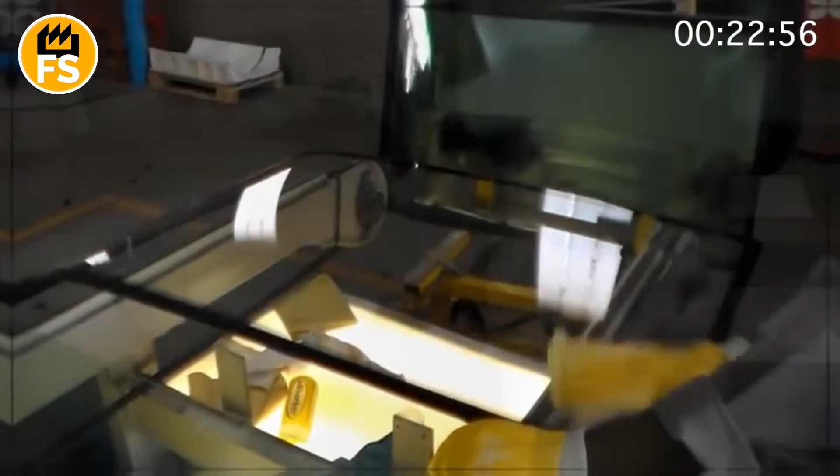After that, for the windshield, a triplex construction is used, which is a combination of glass and polymer film. Its fabrication involves several steps. Layer bonding. A polymer film is placed between two sheets of glass. The construction is placed into a vacuum press to remove air bubbles. Then the glass is heated in an autoclave to 284 degrees Fahrenheit under high pressure, ensuring a strong bond between the layers. Triplex has high impact resistance, and if damaged, the fragments stay attached to the polymer film, thus providing safety for the driver and passengers. Afterward, to enhance the properties of automobile glass, various coatings are applied.

Anti-glare coatings reduce glare from the sun or from other vehicles' headlights. Ultraviolet protection: special layers block harmful ultraviolet radiation. Hydrophobic coatings allow water to bead and roll off the glass surface. Heating elements: thin heating filaments can be embedded in the windshield, making it easier to remove ice or condensation.

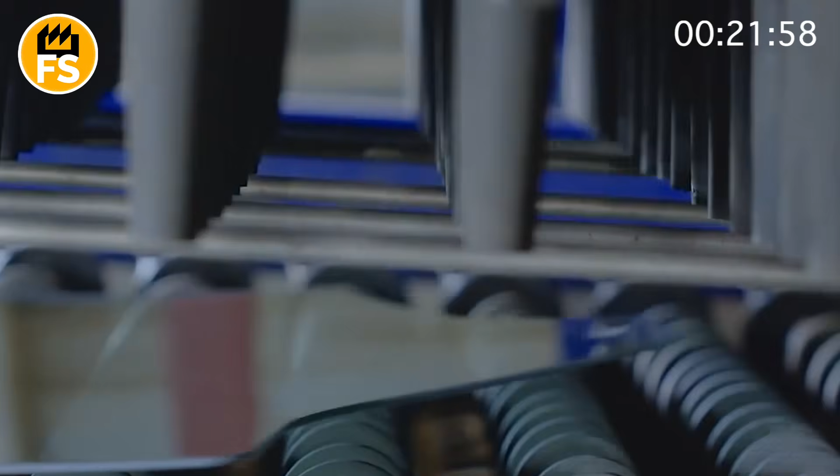To achieve the required shape, special thermoforming equipment is employed. The glass is heated to a temperature at which it becomes pliable, and it is then molded according to specified parameters. And here we arrive at the final stage. During this stage, each piece undergoes a thorough inspection. The transparency is tested, and any defects are identified.

Next, the glass is tested for impact resistance and durability under load. Compliance with standards, the accuracy of dimensions, the shape, and other parameters are verified. Then the finished automobile glass is packaged in a manner that prevents damage during transportation. It is delivered to automobile factories or service centers, where it is installed in vehicles.

The production of automobile glass is a high-technology process that brings together physics, chemistry, and engineering. Thanks to advanced technologies and strict quality control standards, automobile glass ensures safety, comfort, and longevity. And just imagine how many stages automobile glass must go through so that we can watch over road safety and admire wonderful vistas along the way. I find it remarkable. Do you also think so?

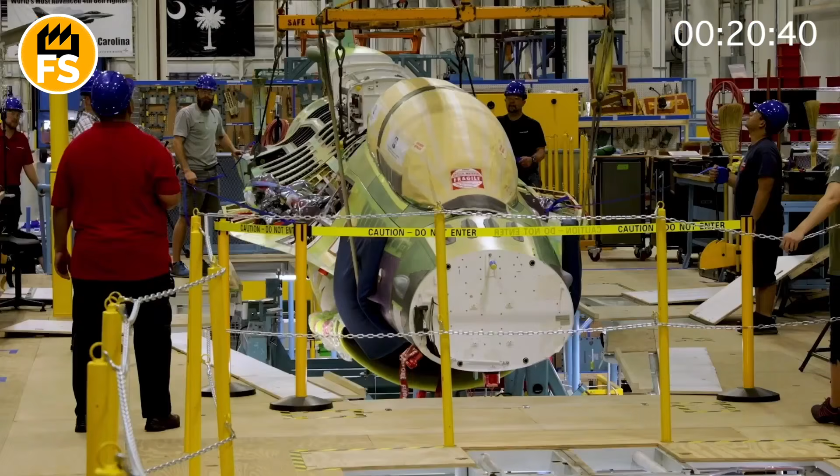Every single day, at the Lockheed Martin factory in Greenville, South Carolina, fighter jets roll off the production line, ready to dominate the skies. This is where the legendary F-16 Fighting Falcon is assembled, each one a true engineering marvel. In just 52 days, hundreds of specialists, robotic systems, and thousands of components come together to create a combat machine capable of reaching speeds of 1,500 miles per hour.

How is this steel predator built? I visited the factory and saw it all with my own eyes. Ready to dive into the heart of aircraft manufacturing? Buckle up, we are taking off. At the massive Lockheed Martin factory in Greenville, South Carolina, the day begins with the roar of machinery. Gets the adrenaline pumping, right? My heart is racing. Here, in the heart of aerospace engineering, one of the most famous fighter jets in the world, the F-16 Fighting Falcon, is brought to life.

But the process of building each F-16 begins long before the first part arrives at the factory. Engineers at Lockheed Martin start by working with 3D modeling systems using CATIA V5 and Siemens NX software. A digital twin of the aircraft is created to test virtual aerodynamics, simulate material strength, and optimize the placement of cables, pipelines, and electronic systems. After that, supercomputers run numerous simulations to predict how the F-16 will perform at different speeds, in combat maneuvers, or under extreme temperatures.

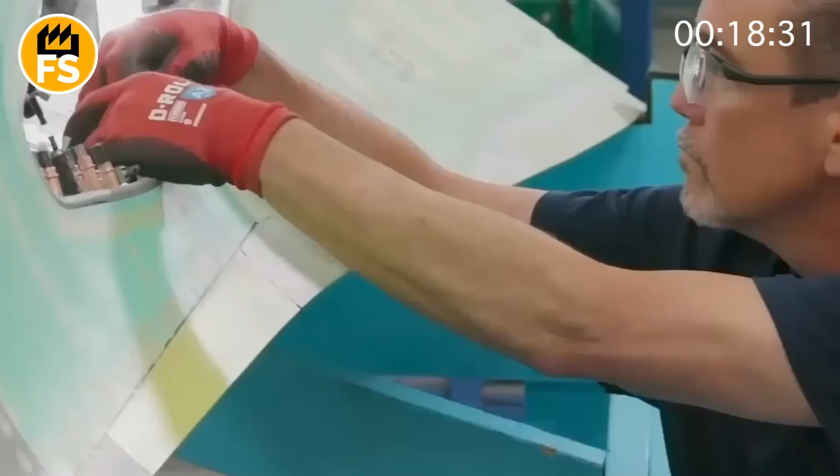To test the strength of the structure, prototypes of key components, such as the wings, nose section, and tail, are built and subjected to rigorous lab tests. They undergo vibration-resistant simulations to mimic turbulence, as well as extreme temperature exposure, heating up to 302 degrees and cooling down to minus 76 degrees Fahrenheit. And let's not forget impact resistance tests, like simulating a bird strike at 559 miles per hour. You love crash tests too, right?

It is thrilling. Meanwhile, a separate team works on the cockpit. Test pilots evaluate the ergonomics of the instruments, the positioning of the HUD display, and the ease of control. As for the materials, supply issues are never a concern. Lockheed Martin signs contracts 2 to 3 years in advance. The standard material set includes aluminum and titanium alloys from Alcoa and Timet, which form the fuselage structure, composite materials from Toray and Hexcel, used for wings, fairings, and radar-absorbing elements. Aerospace electronic systems, including radars, avionics, and targeting systems, are provided by Northrop Grumman and Raytheon.

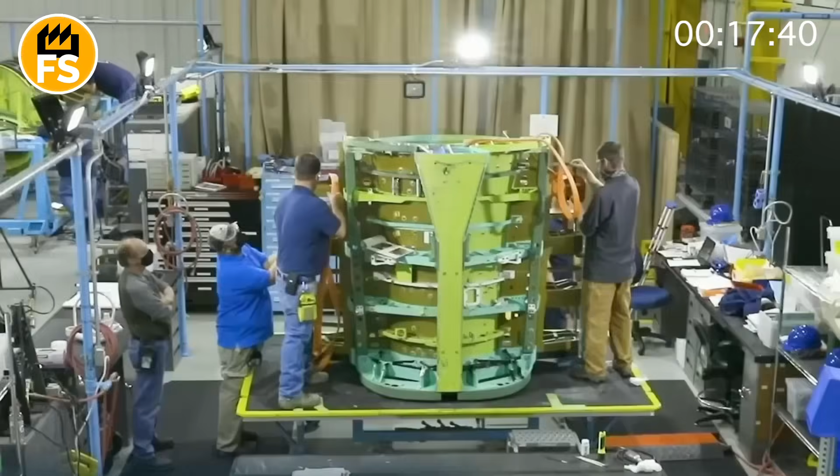In the morning, the factory floor at Lockheed Martin has a quiet but focused atmosphere. This is not just manufacturing. This is where fighter jets that will rule the skies are born. Workers are at their stations. Some are prepping riveting guns. Others are reviewing blueprints, while some are operating laser measuring systems. Today, another F-16 Fighting Falcon is being assembled, and everything must be flawless. As you might have guessed, the factory follows a modular approach. Instead of building an entire jet in one place, it is assembled in sections before being joined together.

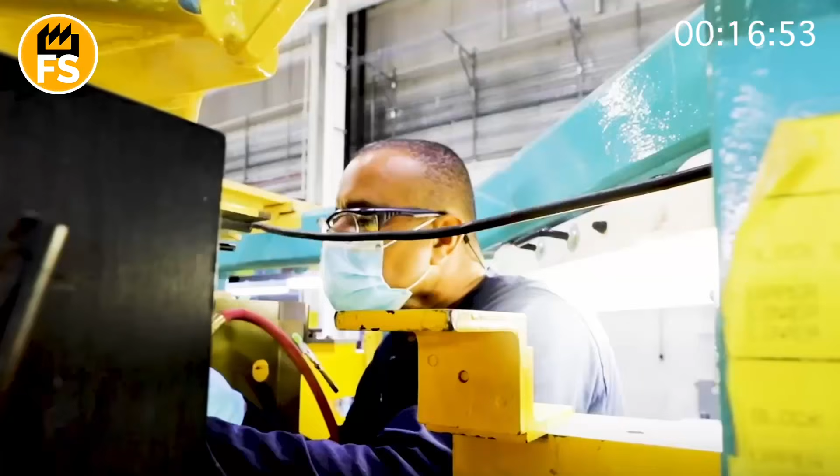In one of the workshops, the aluminum cockpit frame is already complete. Nearby tables hold avionics instruments, HUD displays, and computer system modules. Workers in white gloves carefully install them into compartments. The ejection seat mount is fitted, and a 12mm thick bulletproof canopy glass is installed, capable of withstanding a 13mm bullet impact. 12.5 miles of wiring are laid out, connecting sensors, displays, and control systems.

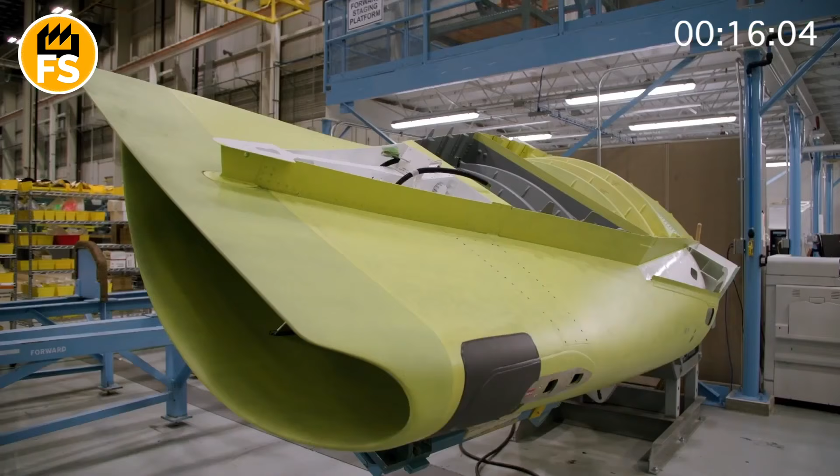Meanwhile, the central fuselage section is being assembled, the area that houses the fuel tanks, landing gear, and wing mounting points. A large aluminum frame is secured with 40,000 rivets installed by automated riveting robots. Fuel tanks with a total capacity of 845 gallons are integrated into the structure. The landing gear, capable of handling loads up to 44,000 pounds, is installed and tested. Workers meticulously check the tanks for leaks by filling them with a special gas and inspecting for any seepage.

In the adjacent workshop, the tail section takes shape. It is welded together using titanium and composite panels, with an engine mount already in place, designed to withstand temperatures exceeding 2,192 degrees Fahrenheit. The elevator and rudder are then installed, followed by a check on the emergency braking mechanism. A specialized team handles this section since the tail not only controls flight, but also maintains the jet's overall balance.

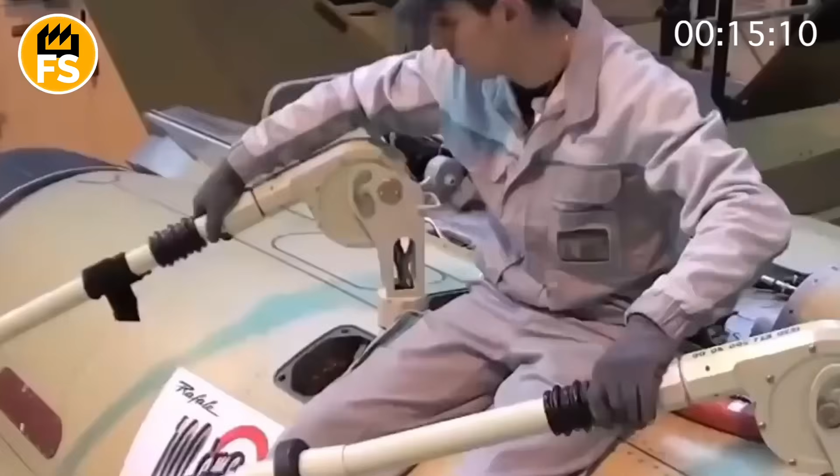The wings are assembled in a dedicated section. Hydraulic mechanisms for controlling flaps and ailerons are installed, along with hardpoints for weapons. The composite wing surfaces undergo ultrasonic testing for defects. If even one layer of carbon fiber is improperly placed, the wing could deform under combat stress. So there is zero tolerance for errors. Once all modules pass rigorous inspections, they are transported to the final assembly line.

The final assembly line is a massive hangar stretching 437 yards long, where hundreds of specialists work in precise coordination. Everything follows a strict schedule. Any delay in one step can impact the entire process. The central fuselage is lifted by a specialized crane and aligned using lasers. First, the cockpit is attached, followed by the tail section. Engineers use high-strength titanium bolts capable of withstanding loads of approximately 88,180 pounds.

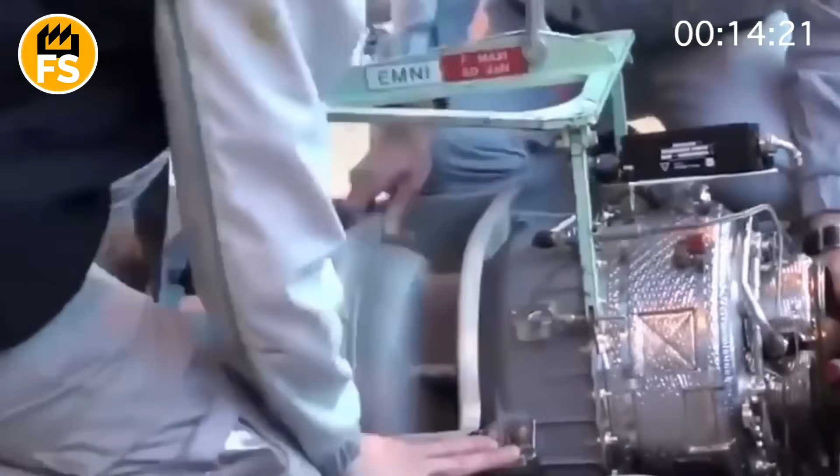Once the primary structure is complete, it is time to attach the wings, which are secured with reinforced titanium joints to ensure structural rigidity. Engineers meticulously check the alignment angles to ensure the error margin does not exceed allowable limits. After assembling the airframe, one of the most critical moments arrives: the installation of the jet engine. It is transported in a specialized container and lifted into the tail section using a hydraulic hoist. Technicians carefully connect all systems: fuel lines, hydraulic and electrical cables, and the afterburner system that enables supersonic flight. Once installed, a dry test run is conducted to verify its operation without fuel ignition.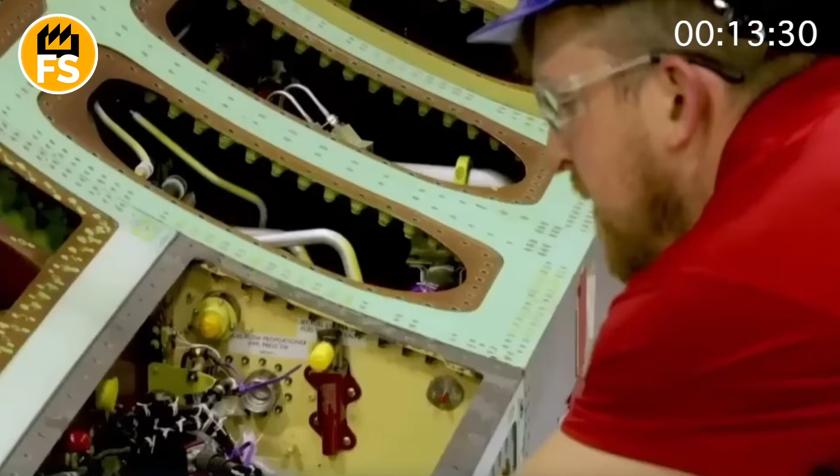The onboard computer, pilot displays, weapons control systems, and the AN/APG-83 radar, capable of detecting targets at a range of 100 miles, are then integrated. Before the first flight, the F-16 receives anti-corrosion treatment, paint, and stealth coating.

As a kid, my best friend was obsessed with origami. She was into everything from Eastern culture, so origami never stood a chance of being ignored. Me? I was terrible at it. My fine motor skills were not exactly top-notch, so while she was crafting intricate dragons and delicate flowers, I was busy making paper planes of all sizes and launching them from my window into the backyard. Could I have imagined back then that I would one day step into the legendary Lockheed Martin factory and witness the birth of an F-16 with my own eyes? Absolutely not.

Before an F-16 takes to the skies, it must undergo a series of ground tests. Every flight system, electronics, fuel supply, and hydraulics is tested on the ground first. The engine is warmed up to operational temperature, and the exhaust system and airflow temperature in the ducts are inspected. Special attention is given to the ACES II ejection seat and emergency systems that might be needed in a crisis. Once all ground systems pass, the pilot receives clearance for the first flight. Communication with ground controllers and engineers is checked in real time.

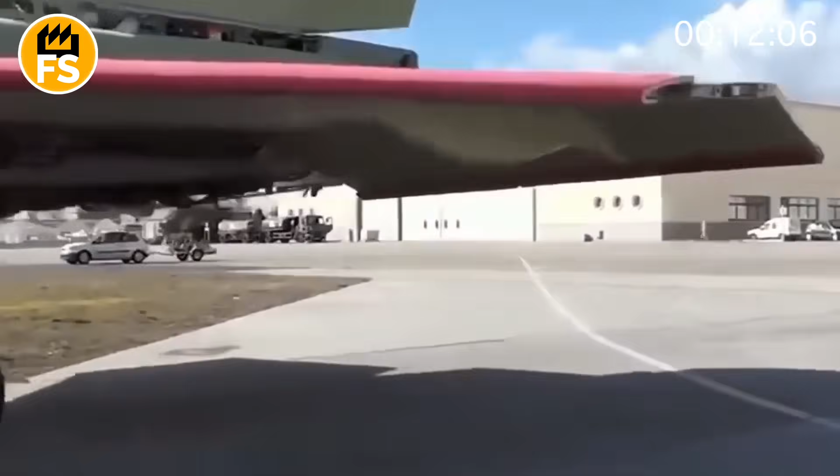After completing initial flight tests, the pilot begins the descent. At 3,000 yards, the landing gear deploys, and the pilot prepares for touchdown. The effectiveness of brakes and the auto-stabilization system is evaluated. The moment the F-16 touches the ground, it decelerates quickly. Engineers conduct final inspections of electronics, fuel systems, and structural integrity. Data is then analyzed, and if everything checks out, the F-16 is officially cleared for duty.

Every year, over 150 million carats of diamonds are mined worldwide. But did you know that some mines are so deep that the temperature inside exceeds 110 degrees Fahrenheit, and powerful explosions can cause seismic tremors felt up to 50 miles away? Diamond mining isn't just digging. It's a full-scale scientific operation that starts with satellite analysis and can last for decades.

Diamonds form deep beneath the Earth's surface and are brought up through volcanic processes that create kimberlite pipes. These pipes, made of ancient igneous rock, are the primary sources of diamonds and can reach depths of over 10,000 feet, with temperatures inside the mines exceeding 110 degrees Fahrenheit.

To cool these environments, powerful ventilation systems compress air. In some mines, the air is so pressurized that if a door between compartments is suddenly opened, the wind force can knock a person off their feet. Sounds dangerous, right?

Before mining begins, geologists conduct extensive exploration that can last for decades. The process starts with analyzing satellite images and aerial photography. This is followed by field studies, where geologists collect rock samples for chemical analysis. Special attention is given to the presence of indicator minerals like garnets, ilmenite, and pyrope, which suggest the potential presence of diamonds. If the exploration yields positive results, detailed surveying begins.

Drilling rigs create boreholes up to 10,000 feet deep, extracting core samples, cylindrical sections of rock. These samples undergo thorough laboratory analysis to assess the diamond content in the rock. Geophysical methods like magnetic surveys, electromagnetic scanning, and gravimetry are used.

Open pit mining is employed when the deposit is relatively close to the surface. Underground mining is used if diamond-bearing rocks are located at significant depths. Mine shafts are constructed, allowing workers and equipment to descend. Mining begins with drilling boreholes into the kimberlite rock. For this, massive drilling rigs over 50 feet tall are used. Each borehole can reach lengths of 2,000 feet, and a single mine may have tens of thousands of such holes.

After drilling, explosives are placed in the boreholes, and the detonation occurs under strictly controlled conditions. Some diamond mines use such powerful explosives that underground blasts can trigger minor seismic tremors detectable over 50 miles away. First, vertical shafts are dug, reaching depths of over 10,000 feet. The diameter of the main mine shafts often exceeds 20 feet. Additionally, horizontal tunnels are constructed, stretching for several miles.

After the explosion, the rock in the mine breaks into pieces of various sizes, from large boulders to fine gravel. Powerful loaders with buckets lift the debris and transport it to central transfer points. Here, massive dump trucks, each capable of carrying over 250 tons of rock, load the extracted material and deliver it to the main tunnels. In some mines, instead of trucks, specialized electric trains running on tracks tens of miles long are used, capable of transporting over 500 tons of kimberlite rock per trip.

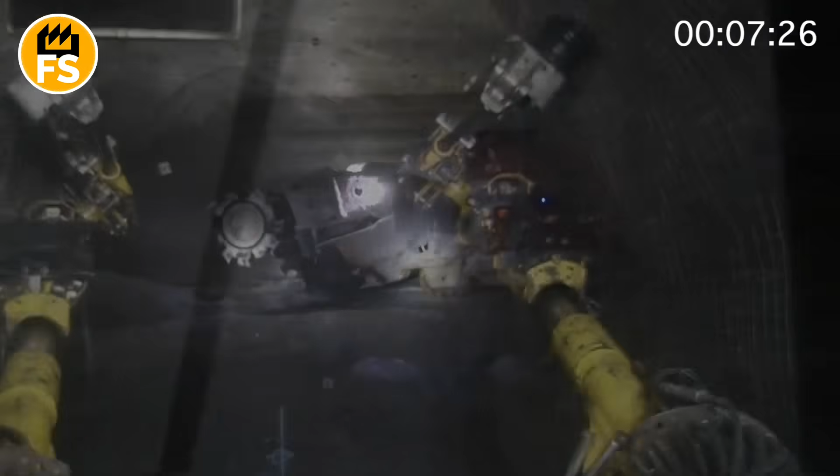The main tunnels are equipped with conveyor systems that start at depths of several thousand feet and extend to the surface. The length of these belt conveyors can exceed 15 miles, with belt widths over 6 feet. Some systems have multi-level structures, allowing simultaneous material transport from different parts of the mine.

Before being placed on the conveyor, large rock fragments pass through crushing stations, where massive steel rollers over 20 feet long break the debris into fragments no larger than 3 feet in diameter. The crushers operate with compressive forces of tens of thousands of pounds per square inch and can process over 10,000 tons per hour. After initial crushing, the material is loaded onto the main conveyor belts, which transport it to the washing system. In some sections, the conveyors pass through special grottos equipped with giant sieves with holes of various sizes.

During transport, smaller rock particles are sifted and directed to separate processing lines, while larger pieces move to the next stage of crushing. The newest mines are equipped with automated control systems that analyze the rock composition in real time and adjust conveyor speed and crushing intensity.

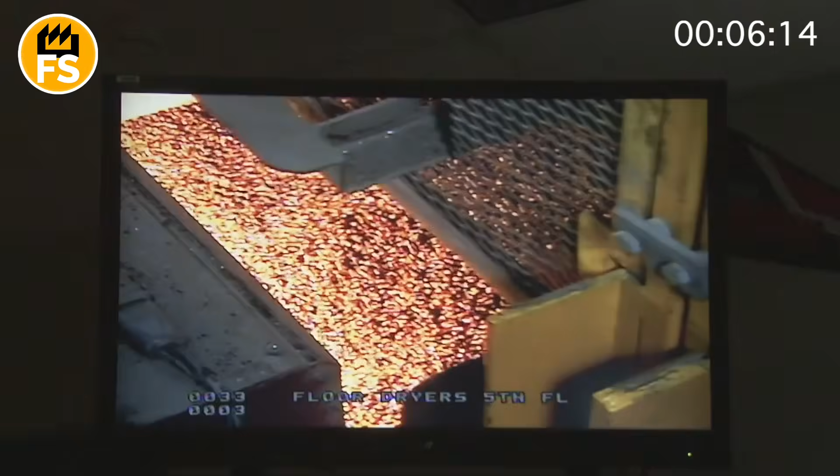As the future diamonds approach the surface, they are fed into special bunkers where the rock accumulates, ready for further processing. The capacity of these bunkers can exceed 100,000 tons, and their structure allows for even material distribution to washing and sorting facilities. In mines located in deep regions, transporting the rock can take several hours, with annual extraction volumes reaching millions of tons.

When I was a kid, my family loved going to the beach. It didn't happen often, my dad rarely had time off, but when it did, everyone was thrilled and happy. Diving underwater to find seashells, crabs, or even clams, I never imagined that diamonds could be mined from the sea.

Deep sea diamond mining is one of the most complex and technologically advanced methods in the mining industry. Mines are located where kimberlite pipes or alluvial deposits lie beneath the ocean floor at depths exceeding 500 feet. Geologists begin by conducting surveys using underwater drilling rigs. These rigs are stationed on specialized offshore platforms or vessels equipped with computerized navigation systems for precise positioning over potential deposits.

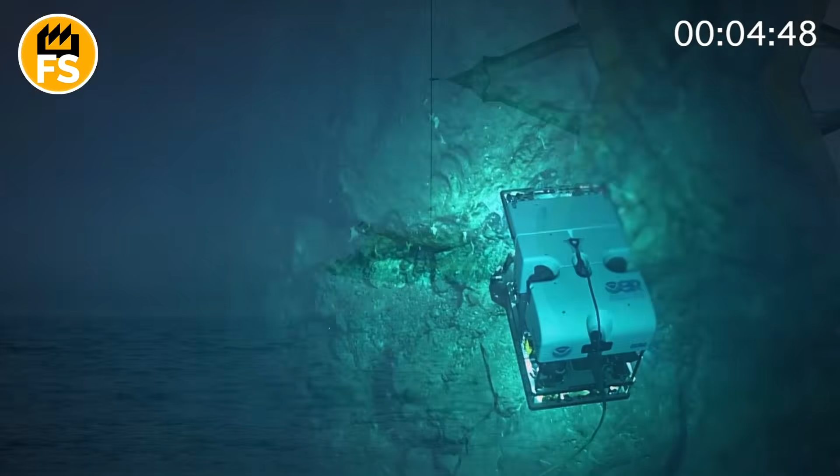Once diamond-bearing deposits are confirmed, the construction of an underwater mine begins. This is a complex process involving the creation of sealed tunnels or the use of massive drilling capsules operating under high pressure. One method involves using giant seabed drilling complexes, which can exceed 200 feet in length and weigh over 5,000 tons. These complexes are equipped with diamond-tipped drills capable of cutting through even the hardest rock.

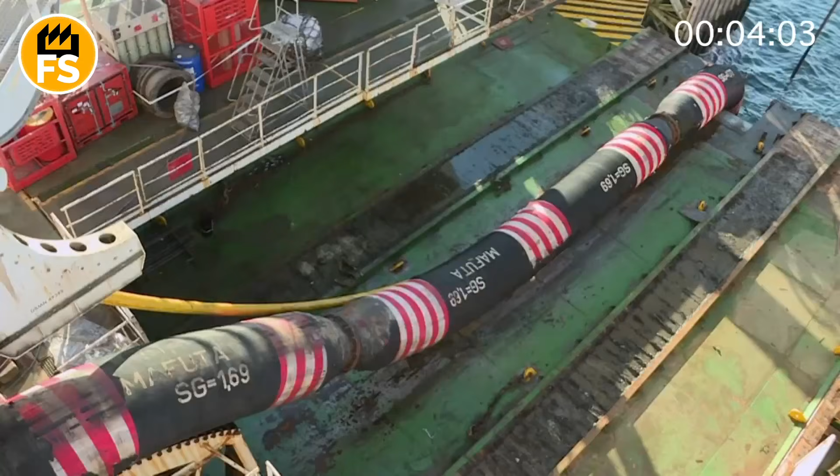During drilling, a specialized hydraulic system creates a water flow under pressures exceeding 3,000 pounds per square inch, washing out small rock particles and diamonds into special reservoirs. Another method uses giant underwater vacuum systems that can descend to depths of up to 1,000 feet and suck up hundreds of thousands of cubic feet of rock per hour. The material is then brought aboard a vessel or platform for initial processing. Special underwater crushers can process up to 50 tons of kimberlite rock per hour.

Powerful pumping systems are used to transport the rock to the surface, capable of moving up to 1 million gallons of water per day. Streams of enriched rock are directed through pipelines that can stretch for several miles. The material then enters large sorting tanks, where it passes through gravity separators. Heavier diamonds settle at the bottom, while lighter particles are washed away and returned to the sea.

Remotely operated underwater vehicles play a crucial role in deep-sea mining, operating at depths of up to 10,000 feet. They are equipped with manipulators that can precisely collect large diamonds directly from the seabed. Their high-resolution cameras allow operators, located hundreds of miles away, to control the process in real time.

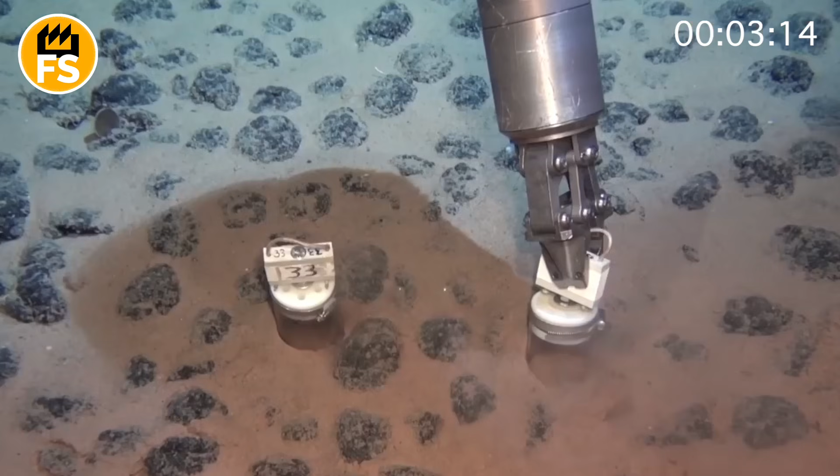Deep-sea mining is so complex and costly that only a few countries in the world have the necessary technology. It can cost hundreds of millions of dollars, and the full mining cycle can take over 10 years. Despite the challenges, this method yields millions of carats of diamonds annually, supplying the global market with precious stones hidden in the ocean's depths for billions of years.

On the surface, the extracted rock is crushed in processing plants, where massive steel jaws over 20 feet long break the stones into fragments smaller than 2 inches. Each plant can process over 10,000 tons of material per day. After crushing, the rock passes through a series of washing tanks filled with water and chemical reagents. Diamonds, which have high density, settle at the bottom, while lighter minerals are washed away.

Once the material is on the surface, specialized X-ray separators are used to identify diamonds based on their ability to fluoresce under ultraviolet light. Magnetic separators work by exploiting differences in the magnetic properties of materials. Diamonds are non-magnetic, while most minerals in kimberlite rock have weak magnetic properties. In these systems, the rock is fed onto rotating drums over 20 feet long, which generate strong magnetic fields exceeding 10,000 Gauss. Magnetic mineral particles stick to the drum's surface and are removed into a separate container, while diamonds and non-magnetic rock residues move forward.

X-ray systems are used in the next stage, when the rock is already significantly purified. These systems rely on diamonds' unique ability to fluoresce under X-ray radiation. The stones enter a special tunnel where they are exposed to X-rays with energies of up to 200 kiloelectron volts. The diamonds begin to glow, and highly sensitive optical sensors instantly detect their location. The system then activates a high-speed air jet operating at pressures exceeding 100 pounds per square inch, which literally blows the diamonds out and directs them into a collection container.

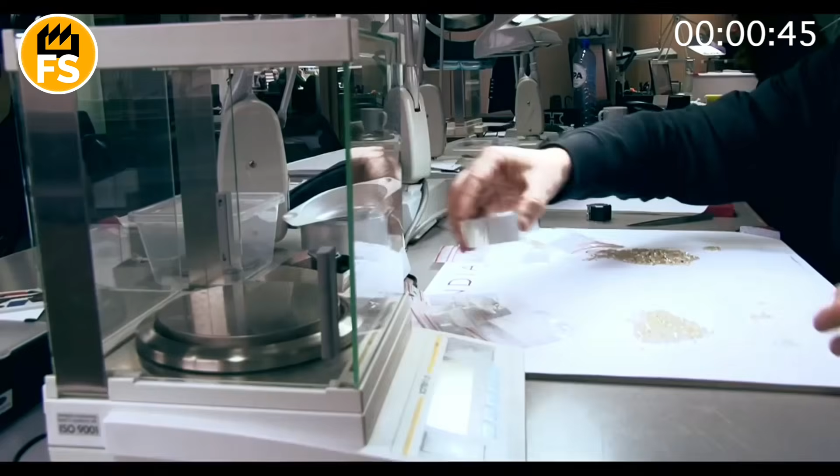The cleaned diamonds are sorted by size, quality, and color. The sorting process is fully automated and managed by operators in specialized control centers. Each operator monitors dozens of X-ray systems using high-resolution computer panels. Modern systems use machine learning algorithms that can adjust equipment parameters in real time for maximum efficiency. If malfunctions or deviations occur, operators can manually change settings or redirect material flows for reprocessing.

A single system can process up to 20 tons of material per hour with precision that detects even the tiniest diamonds smaller than 1/10 of an inch. At large diamond mines, dozens of such systems operate simultaneously, extracting hundreds of millions of carats annually. After sorting, the diamonds are sent for cutting, where artisans use lasers and mechanical tools to transform them into precious gemstones. Once cut, they enter the market, sold as part of jewelry or used for industrial purposes.